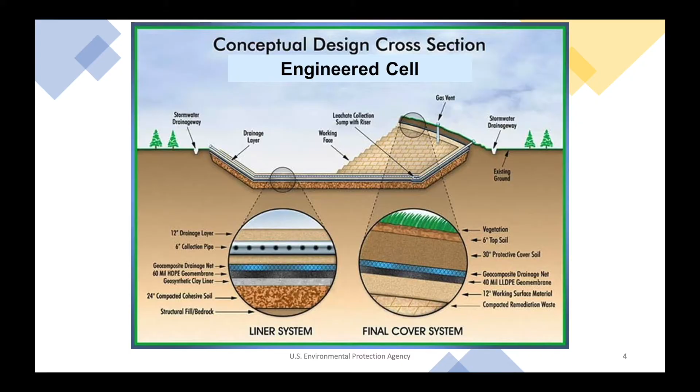Under the 2013 Record of Decision, EPA had planned to place the waste, soil, and sediment at Salford Quarry inside a cell like this. During the design of the engineered cell, EPA realized that there wouldn't be enough space next to the quarry to be able to temporarily store the waste, soil, and sediment during construction. To make matters more complex, if the site material were to be stored off-site, land disposal requirements would be triggered, meaning that the material would need to be treated at a facility permitted to treat hazardous waste before returning the material back on the quarry property.

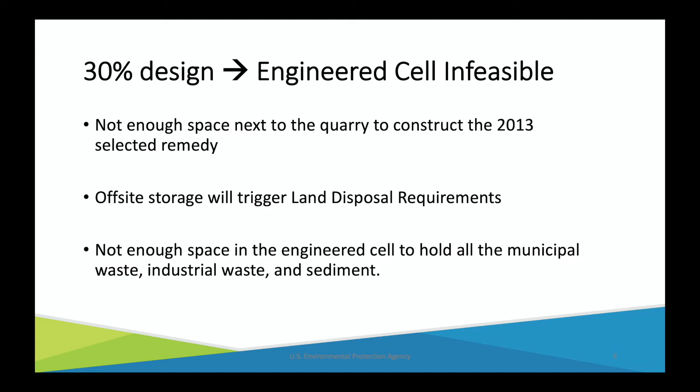And when the material is dug out, the volume would expand. And then when it's treated, it would expand even more. So there wouldn't even be enough space in the cell to hold all this material if it were to be trucked off-site, treated, and returned.

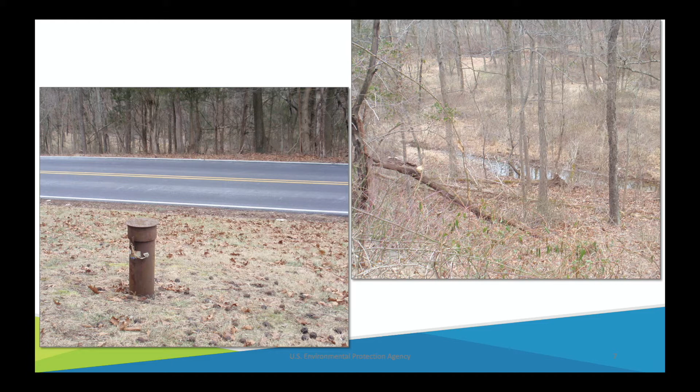So we need to change or amend the cleanup selected in 2013. This proposed plan shares the rationale for changing the cleanup and suggests EPA's preferred cleanup. The final cleanup plan for Operable Unit 1 will be issued in a record of decision amendment after our public comment period closes and your comments are considered.

In this proposed plan, EPA prefers what we call WS11. WS stands for waste and soil. We use that naming convention to keep track of the waste and soil cleanup options. WS11 includes constructing a perimeter wall and cap to contain the contaminated material on site. We are looking to prevent direct contact and minimize water, both groundwater and surface runoff, from carrying the contamination in the quarry into the environment.

A perimeter wall is a wall that's installed underground to stop groundwater from flowing into the waste from the sides. It can be built out of various materials, such as bentonite slurry, high injection grout, or sheet pile metal. Both the perimeter wall and the waste would be beneath a cap designed to contain hazardous waste.

This type of cap is referred to as a RCRA cap. RCRA stands for Resource Conservation and Recovery Act, which is the law that created the standards for properly managing hazardous waste. You'll see this term RCRA throughout the slides and proposed plan.

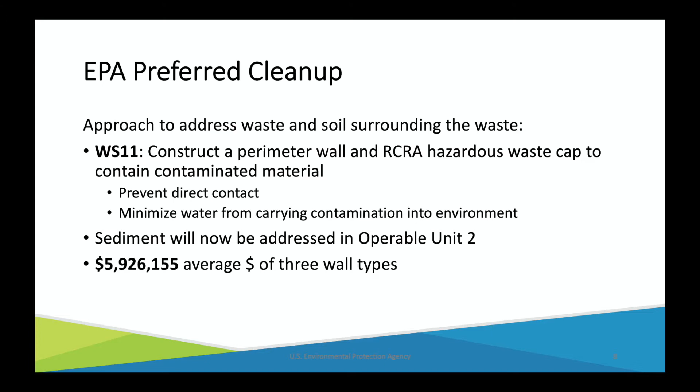The quarry property was used from the early 1900s to the 1930s as a shale quarry until water collecting in the bottom of the quarry caused difficulties in removing more rock. Afterwards, locals used the property as a swimming hole. Then, in the 1950s, a waste disposal company disposed of industrial, commercial, and residential waste into the unlined quarry.

In 1963, a company called American Olean Tile, or AOT, as you'll see on the slide, purchased the property and disposed of tile waste, glazed sludge, settlement pond sediment, and 2 10,000-gallon former oil tanks into the quarry. Borosilicate, a form of boron, was used in that glaze.

In 1980, the Pennsylvania Department of Environmental Resources, which is now the Pennsylvania Department of Environmental Protection, or what we call PADEP, notified American Olean Tile that it was in violation for failure to have a permit. American Olean Tile located the 2 buried 10,000-gallon tanks and sampled the contents. Pennsylvania allowed them to bury the tanks after removing the fuel oil.

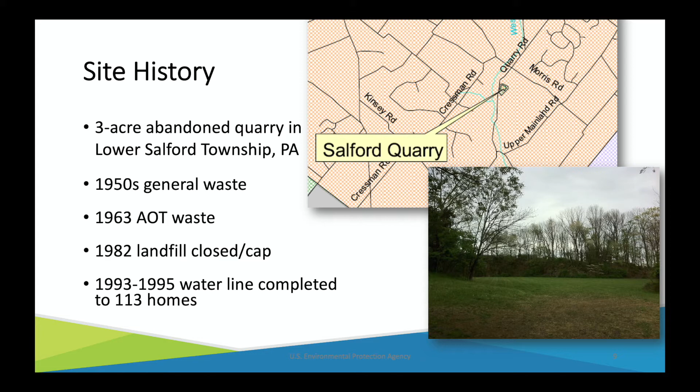In May 1982, American Olean Tile closed the landfill by grading and capping the waste with approximately 6 feet of clay. Here's a picture of the current clay cap. It looks like a grassy field. In 1987, the site was proposed to the National Priorities List, which is commonly referred to as the Superfund list. However, the court delisted the site based upon a challenge from the responsible party.

In 1993, the responsible party declared bankruptcy, leaving EPA to perform any work at the site. A trust was established to perform operation and maintenance of the clay cap and conduct groundwater monitoring. Under EPA's removal program, the responsible party supplied bottled water to affected residents until a water line was extended to 113 homes.

Salford Quarry officially became a Superfund site in 2009, which means EPA considers it a priority to address contamination. Once the site was officially added, EPA could continue to perform cleanup activities. Cleaning up Superfund sites is a multi-phase process. The Salford Quarry site underwent site assessment and remedial investigation and feasibility study before it was relisted in 2009.

During the remedial investigation, the nature and extent of contamination was identified, and a risk assessment was conducted. The draft remedial investigation feasibility study report was issued in 2007 for all environmental media: waste, soil, groundwater, surface water, and sediment. After the 2007 remedial investigation and feasibility study, EPA split the site into operable units in order to move Operable Unit 1 through the cleanup process.

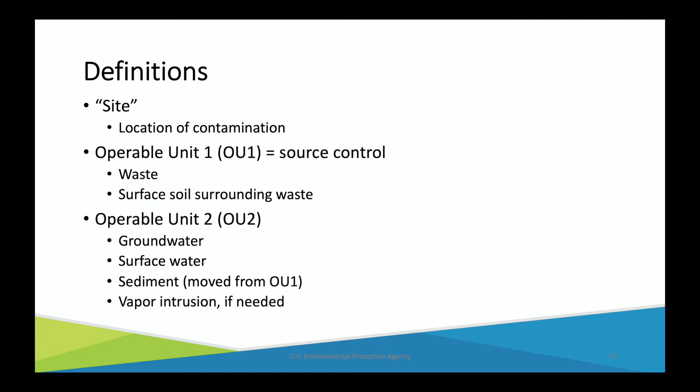Operable Unit 1 is the waste and contaminated soil, which is the source of contamination to the groundwater, surface water, and sediment. Once Operable Unit 1's cleanup is in place, EPA will monitor the groundwater, surface water, and sediment. This data will inform what the cleanup needs to be under Operable Unit 2. Right now, EPA doesn't believe that vapor intrusion is an issue at the site. However, we included it in Operable Unit 2 if the monitoring data shows that cleanup may be needed.

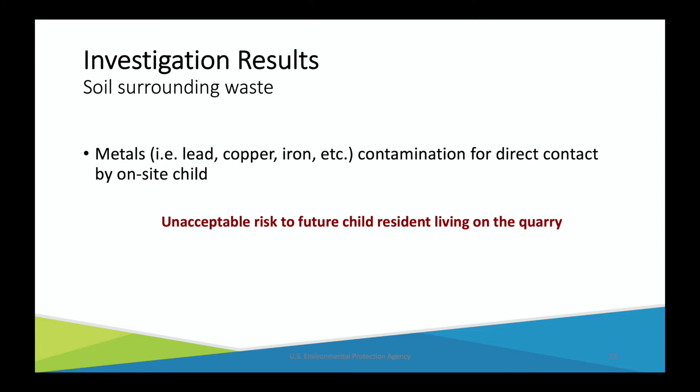Now I'm going to talk about the risks associated with the site soils. Investigation results for soil show unacceptable risk to a future child resident living on the quarry from metals. This slide shows where the soil samples were taken. Exceedances were at SL07 and SL08. Surface and subsurface soils were collected at 5 locations situated around the perimeter of the landfill and 3 locations off-site and up gradient from the landfill.

Each sample location had surface soils taken from 0 to 6 inches below ground surface, and another interval called a subsurface soil sample taken from 6 inches to 24 inches below ground surface. As I mentioned, SL07 and SL08 were the only samples that showed unacceptable risk.

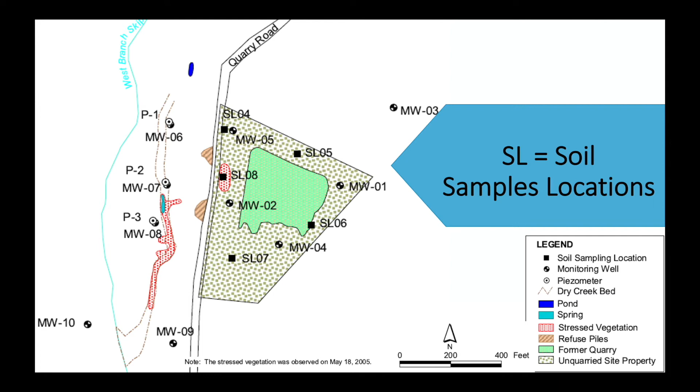Now I'm going to talk about the risks associated with the waste buried in the quarry. During the investigations, EPA found tile and municipal waste to the bedrock surface, which is between 35.5 to 37.5 feet below ground surface. Cadmium and lead concentrations in the tile waste exceeded federal regulatory limits for hazardous waste, which indicates the potential for these contaminants to migrate into groundwater.

There's no federal limit for boron, even though boron is detected at extremely high levels in the upper tile waste and is pervasive throughout both the tile and municipal waste. Investigations show boron contamination in the waste could leach into groundwater. The toxicity characteristic leaching procedure methodology is used to determine if a waste is hazardous. The process simulates leaching through a landfill.

As previously mentioned, the quarry waste is hazardous for cadmium and lead, but boron, which is what we're seeing as impacting the groundwater, has no federal limit for this toxicity characteristic leaching procedure or no federal limit for drinking water. So EPA developed a risk-based concentration for boron in groundwater. This risk-based concentration is 4,000 micrograms per liter, or what we'll call parts per billion.

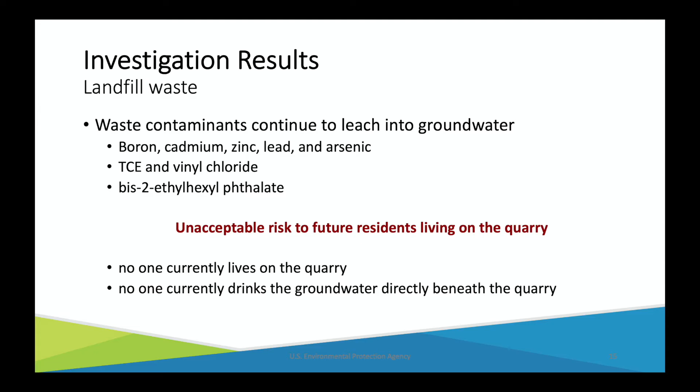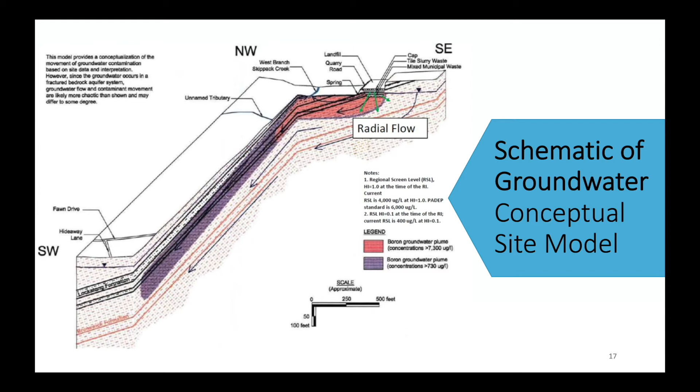This next slide shows that conceptual site model of waste being carried down gradient by groundwater in a cross-section view. So that means if you were to take the plan view and cut it in half and look at things moving up and down. This slide shows boron concentrations from 2004. It shows the area of groundwater contamination above the risk-based standards.

Secondly, the landfill was capped in 1982. That cap decreased the amount of rainwater that was able to come down into the waste and flow through the waste and out as groundwater. And number 3, fewer residential wells were open to be sampled. That was just a construct of the water line being extended. Many residents opted to abandon their groundwater wells that they used to use for drinking. So there were fewer sampling points.

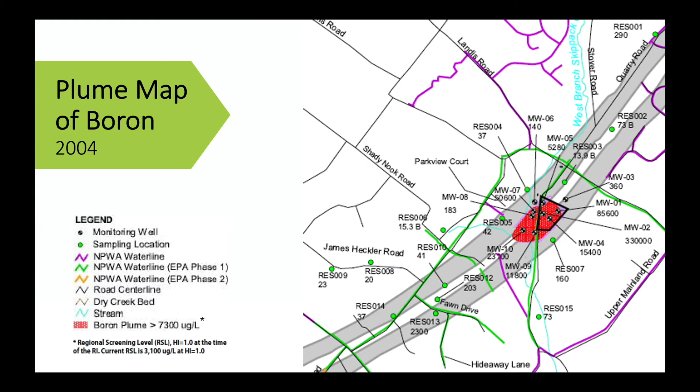MW10, which is the well down in the floodplain, the closest to the site, but not on the quarry property, has a boron concentration of 31,300 parts per billion. While this is still above the risk-based standard, the concentration of boron has fallen an order of magnitude in about 500 feet down gradient of the quarry.

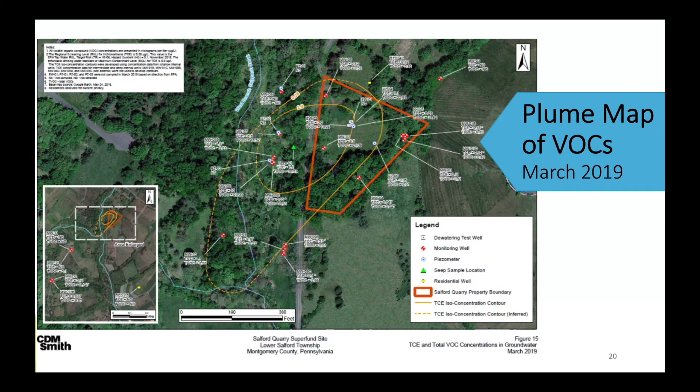This slide shows the volatile organic compounds in groundwater. It might be a little bit hard to read these levels, but they've been consistently low throughout time. This is the most recent concentrations from March 2019, and directly under the quarry, they're very close to the drinking water limit. So as I mentioned before, we don't think that vapor intrusion is an issue, and it relates to this, because the levels of volatile organic compounds are fairly low and limited to right beneath the quarry.

During design, EPA found the groundwater level inside the quarry waste is higher than the water level outside the waste. This slide shows the mounding of the groundwater table inside the quarry waste. Groundwater would run from the red to the yellow to the green contours in the direction of the white arrows. Near the top of the quarry, it looks as if the water's running radially for a little bit, but the overall general direction of the groundwater is to the southwest.

This mounding of groundwater within the quarry could result in additional migration of contaminants from the waste to the groundwater. EPA also found that the clay cap that was installed in 1982 has lost some of its original integrity to keep rainwater out of the quarry waste. When it rains, the water percolates through the waste. The water level rises and provides an additional opportunity for contamination in the waste to be mobilized into the groundwater.

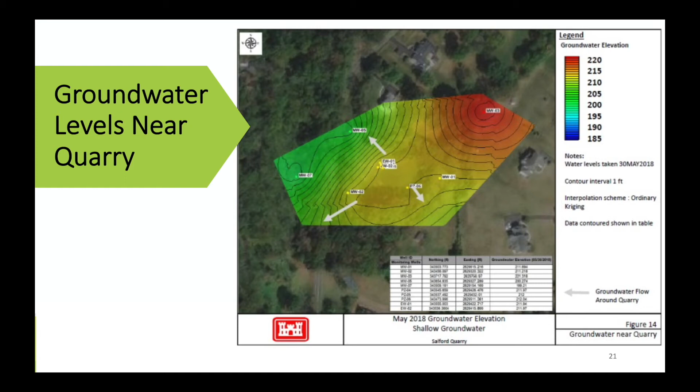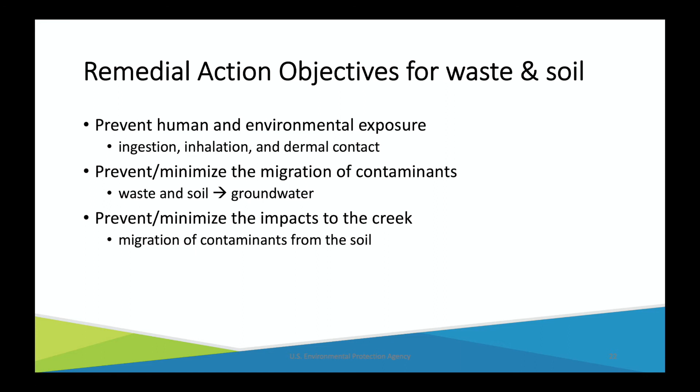These are the same remedial action objectives as in the 2013 record of decision. The objectives pertaining to sediment were deleted since we're now dealing with sediment under Operable Unit 2. In order to change the 2013 cleanup plan, EPA conducted a revised feasibility study to identify and evaluate options to protect human health and the environment from potential risks associated with Operable Unit 1. The options considered for waste and soil are shown here.

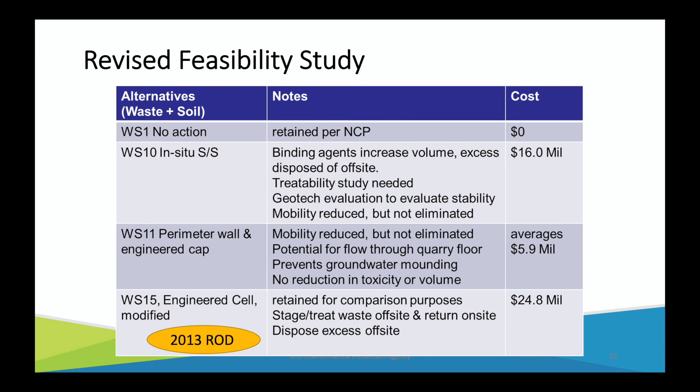WS1 is no action. WS10 is in situ solidification stabilization. WS11 is a perimeter wall and a Resource Conservation and Recovery Act cap. WS15 is an engineered cell that was originally selected in the 2013 ROD, but it was modified because not enough space was available near the quarry to build it as it was put forth in that record of decision.

Alternative WS1 is a no action alternative and required by the National Contingency Plan to provide a baseline. No action means that EPA would not take an action to remediate the contamination. This would only be selected if the site were currently protective of human health and the environment. The cost of this alternative is zero.

Alternative WS10, in situ solidification stabilization. This entails mixing the waste and soil in the ground, or in situ, with a stabilizer to immobilize and keep the contaminants in place. The stabilizer is often Portland cement, but could be other materials based on a treatability study that must be performed during design. After the material is solidified or stabilized, a protective cap would be placed over top. Mixing the waste and soil would increase the volume of the waste, so excess material would need to be trucked off-site for disposal. The cost estimate is $16 million.

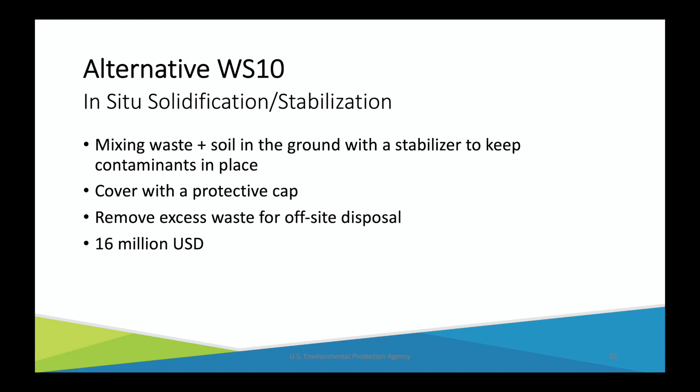Alternative WS11 entails installing a perimeter wall underground around the waste and placing a hazardous waste cap on top. As I described before, the wall will prevent groundwater from entering in the sides of the quarry, and the cap would prevent rainwater and runoff from entering the top of the waste. This would also decrease the groundwater mounding currently existing in the quarry and minimize the amount of water passing through the waste. The cost estimate averages around $6 million.

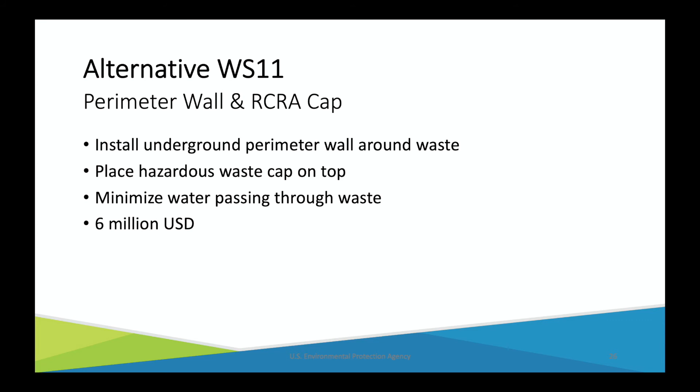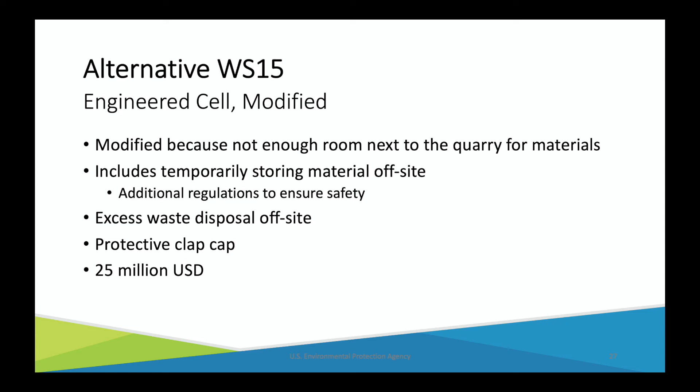Alternative WS15 is the cleanup selected in the 2013 Record of Decision, and it's an engineered cell. This cleanup's modified because there isn't enough room to stage the material next to the quarry. This option includes temporarily storing the material off-site, which triggers regulations requiring treatment before placing it back in the quarry. Excess volume would need to be disposed of off-site. And because this material will be treated, a protective clay cap would be placed over top as opposed to a RCRA or hazardous waste cap. The cost estimate is about $25 million.

All of these options, except for no action, would require regrading and revegetating, monitoring groundwater, surface water, and sediment, operation and maintenance of the cleanup, and engineering and legal controls to prevent access.

The public comment phase allows us to evaluate the modifying criteria, state acceptance and community acceptance. This public comment period is important because it allows us an opportunity to seek feedback from you, the community, before making any final decisions regarding our long-term cleanup plan for the Salford Quarry site.

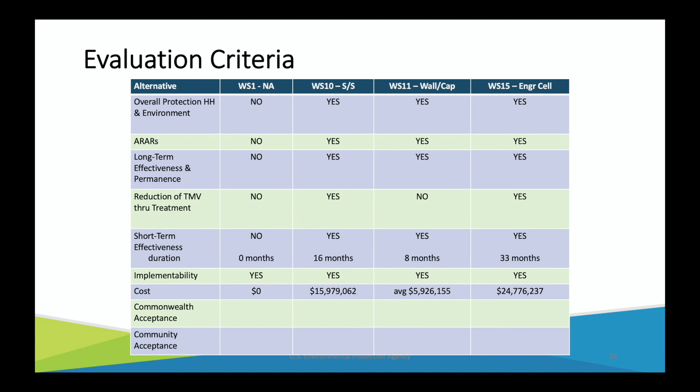This slide shows how EPA evaluated cleanup options through the lens of the 7 criteria. Since alternative WS1 doesn't take an action, it doesn't meet the first criteria of protecting human health and the environment. The other 3 cleanup options are evaluated for each of the top 7 criteria in the proposed plan. The community acceptance will be evaluated in response to your questions and comments submitted during this comment period. State acceptance will also be evaluated from Pennsylvania's comments during the same time period.

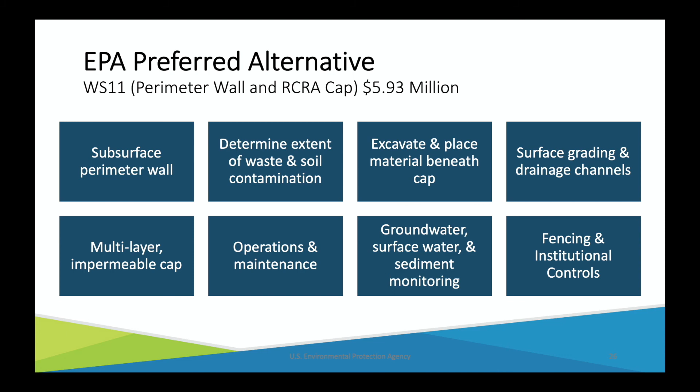So what do we mean when we say perimeter wall and multi-layer impermeable cap? We're proposing to install a perimeter wall underground to circle the waste that's being impacted by the groundwater. The wall would be connected to the top of the quarry rock to minimize the amount of water that can flow into the waste from the sides. These walls can be different materials. We priced out 3 different types: bentonite slurry, grout barrier, or sheet pile. We're intentionally allowing the designers and construction contractors the flexibility to select the material of the wall based upon criteria needed to keep the water out.

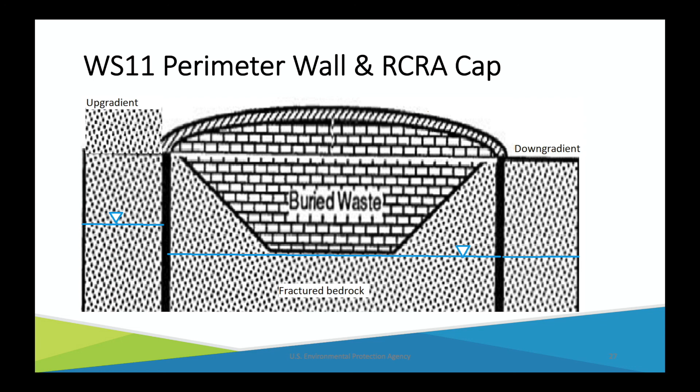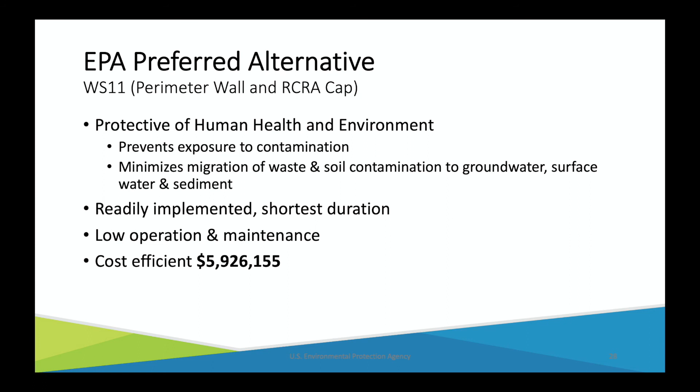This slide shows EPA's preferred cleanup for soil and waste. Once in place, monitoring will occur to see how this affects groundwater, surface water, and sediment. Just to recap, cleanup of Operable Unit 1 will inform what we do for Operable Unit 2 at the Salford Quarry Superfund site. Thanks, Sharon, for that detailed explanation of Operable Unit 1 and EPA's preferred cleanup.